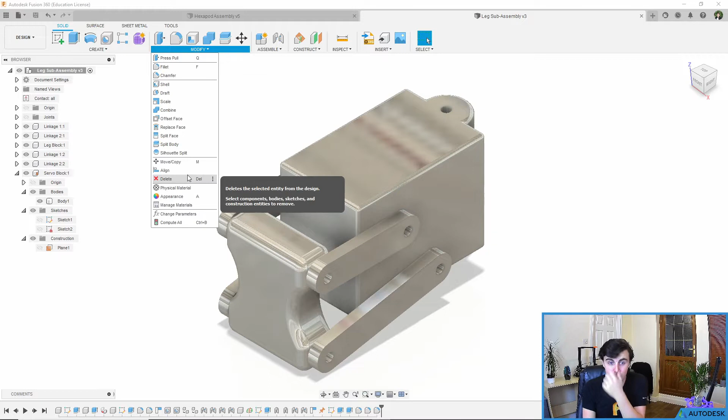The first thing we're going to do is modify our materials. If you remember, we changed everything else in our main assembly to ABS, so we're going to do the same here. I'm going to change our physical material, choose ABS, and drag it onto all of our parts. You can also drag it onto parts in your browser if that's easier. If you can't find them, they're hidden in places, so just be aware you can do it either way.

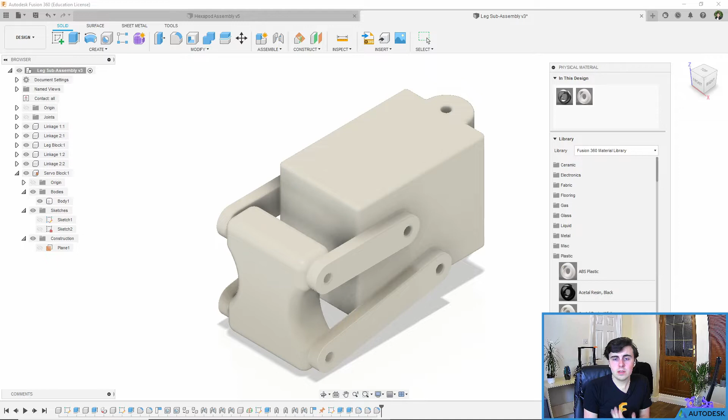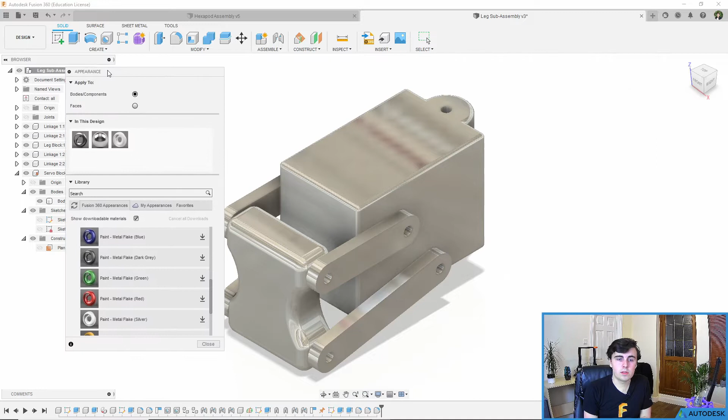Now that it's all ABS, the other thing I want to do is I don't want these to be white, it's just a bit dull. So I'm going to go in and modify my appearances. You can modify your appearance separately to your physical material, and in the case of ABS, you get it in lots of different colors. We're going to go in and choose appearance - you can also press A on your keyboard, that will bring up this appearance menu, which has lots of different options, as you can see.

Normally you start with this long list of 360 appearances. You can also favorite them, but we're going to apply a paint. You can apply lots of different paints - there's the glossy paint, which is the classic. You can drag these on and just test them to see what they look like.

In my case, I quite like these metal flake paints that Fusion has, but you might notice that they're greyed out - I can't drag them, there's a little arrow. This is because these are on the cloud and need to be downloaded to your Fusion. So automatically Fusion doesn't download these all - you'll see this little download button on the right hand side. I quite like this red one, so I'm going to go in and edit it and download the red.

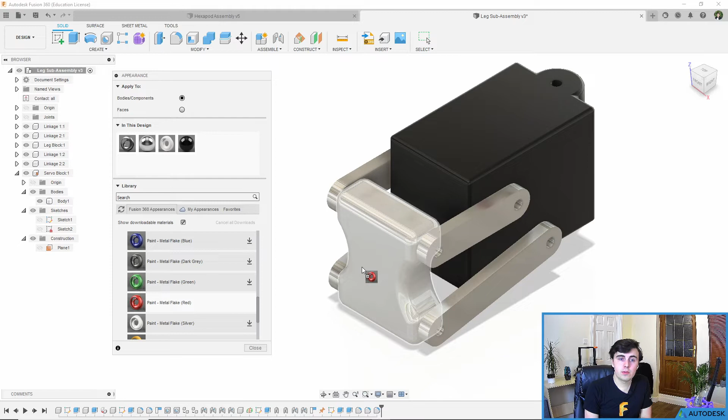You'll see it whirs for a minute and then it becomes white again. I can now use this and drag it onto my part, and it now has this really nice metal flake. I'm going to do the same with the block, I think - make that a nice metal flake black.

And let me make these - let's see, I'm going to use the normal white for these. But yeah, we can always go in and change these a bit later. For you, choose whatever you think looks good - there are loads of really cool options here, from metals and liquids and all sorts. Whilst this is going to be plastic if we made it, in this case you can do whatever you want, make it look cool. So go ahead and have a go at using the different appearances.

You'll notice they all come up here at the top. The other feature I want you to be aware of is this apply to option at the very top. What this changes is you can apply to a single body, for example the entire of our leg block, and instead apply something to a single face. So I could apply a metal of aluminium, for example, to just this front face, and the rest would stay the same. I don't want that, I like my red, so I'm going to undo. But you can apply to just faces if you want to, something to be aware of.

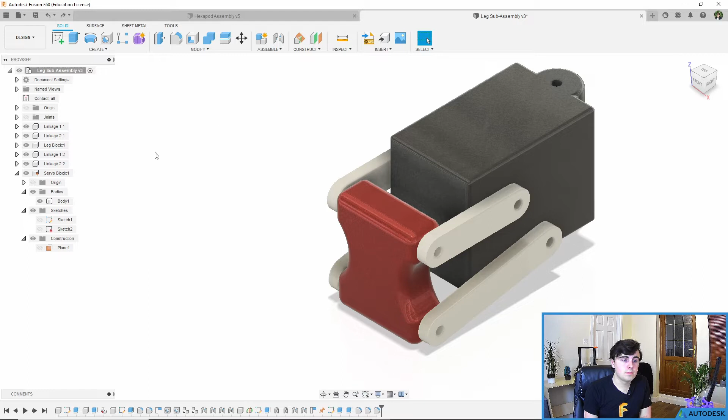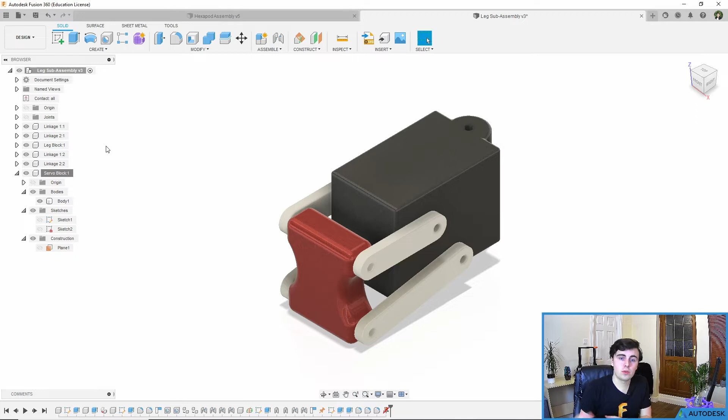The next thing I'm going to do is, now that I know my joints work, I'm actually going to unground our servo block. The reason for this is because I know that in our main assembly it will be fixed, so there's no point in having it grounded here because it could cause problems later down the line. By ungrounding it now, you can make sure that it's all free to move when we import it into our next assembly.

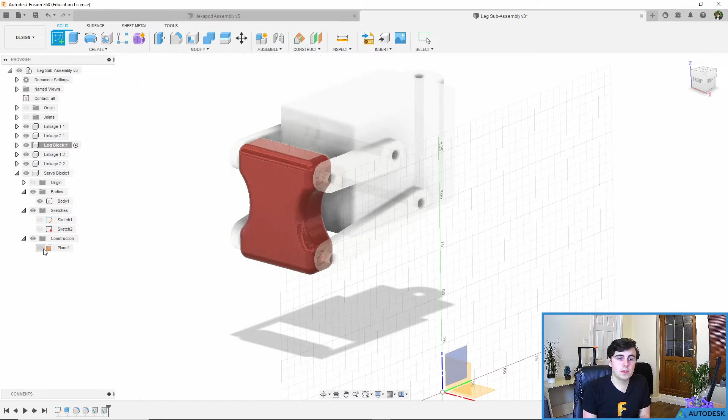The next thing we're going to do is add a little foot onto the end of our part here. So we're going to activate the leg block, so I'm working on that, and I'm going to create a sketch using the same mid-plane that I used before. You can find this within the servo block, because that's where we created it. It's under construction - I actually need to reveal it or unhide it. From here I can select it in the browser or on the main page, and you can see we're now creating a sketch on there.

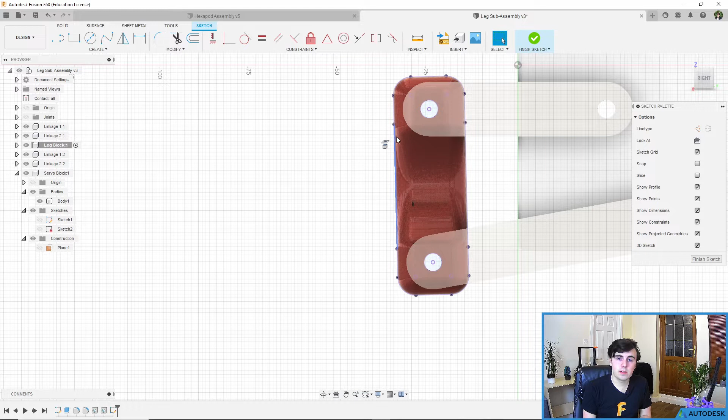I'm going to look at it from the side, and I'm going to use a line - just going to create some cool shapes. Be aware that we want it to lock onto this front surface, so if you press P, you can project as we've done before. I'm going to project this entire body, click OK, and you have this project line on the side there. So you can use the line, and I'm just going to lock it on and make a shape that you're happy with.

I think that looks pretty cool. Again, do whatever shape you like, but we need to make some feet - make sure it's nice and far below the bottom of your leg block. It's now shaded in, so it's an enclosed area because of that line down the middle. So finish the sketch, we can select that,

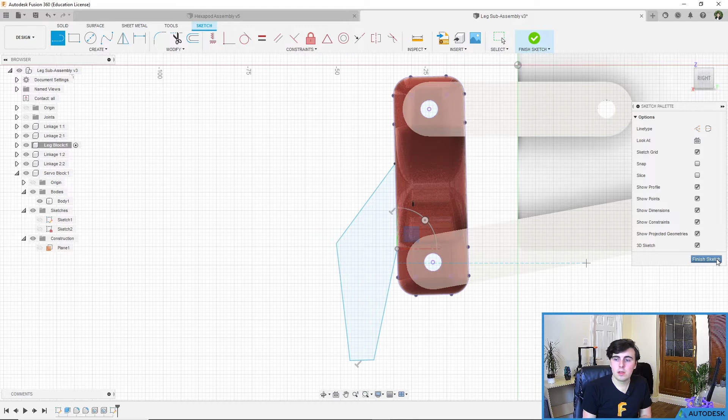extrude, and again we're going to use the symmetric option, make sure that it's symmetric. And you'll notice that it's the same color because it's joining. As I said before, we're now using join because we're activated on the same body, it's recognized that it's touching, and we want it to be one part. So it's automatically joining, which is useful.

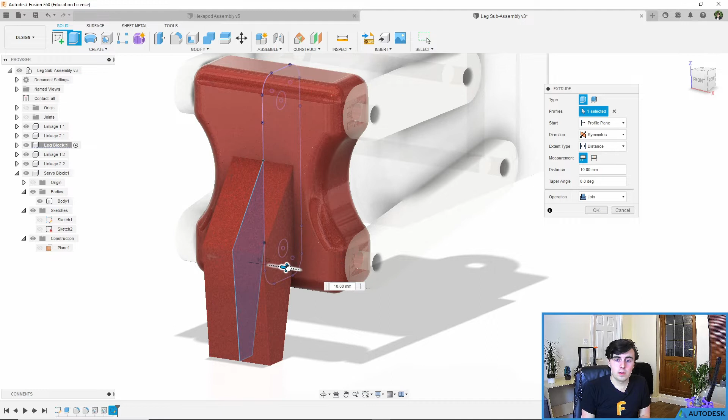I'm going to make this a little bit far - I'm going to make this 7.5 millimeters across. Click OK, and you'll see this is all still one body because we joined it.

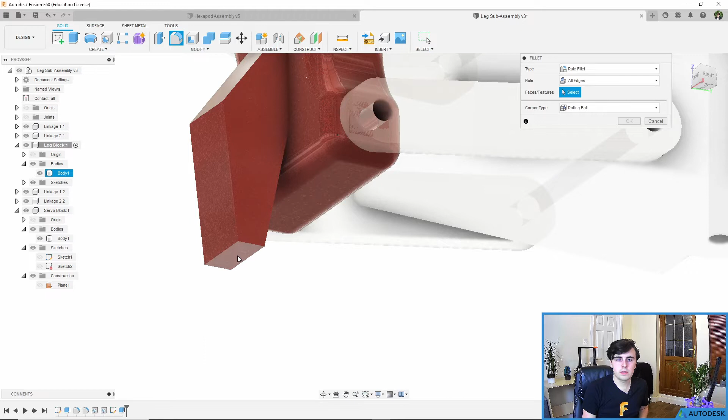I'm going to add some fillets to these just because we want a nice rounded edge on the bottom. So I'm going to go Fillet, select fillet, and just select that bottom edge. We can just play around with that until you're happy with it. There's a nice curved edge down there on the bottom.

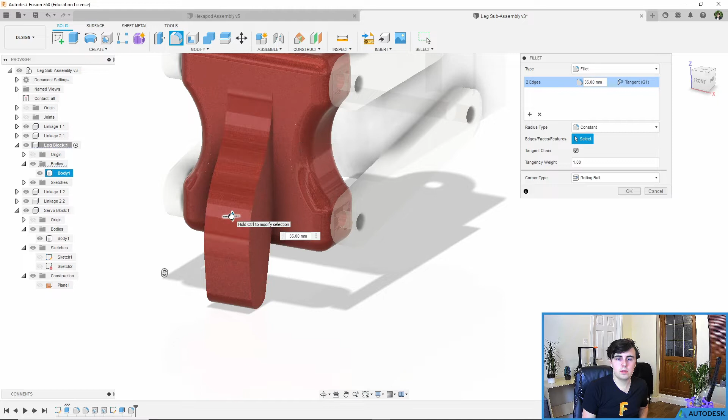I'm also going to add some fillets, just some normal fillets to these edges, just to give it a cool shape. But again, choose whatever fillet size you want, add the fillets that you want. I would recommend adding maybe one in down here at the bottom.

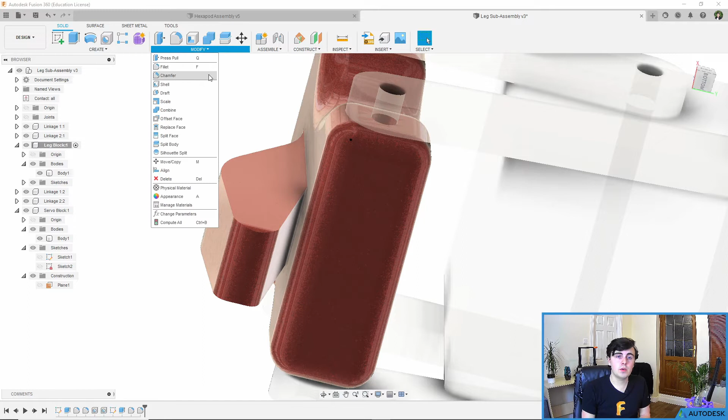But actually, instead of a fillet, what I'm going to do is add a chamfer. Now, a chamfer is slightly different to a fillet in that it's not curved, it's just flat. You can find this within Modify, Chamfer. I'm going to select that bottom edge and just drag it down.

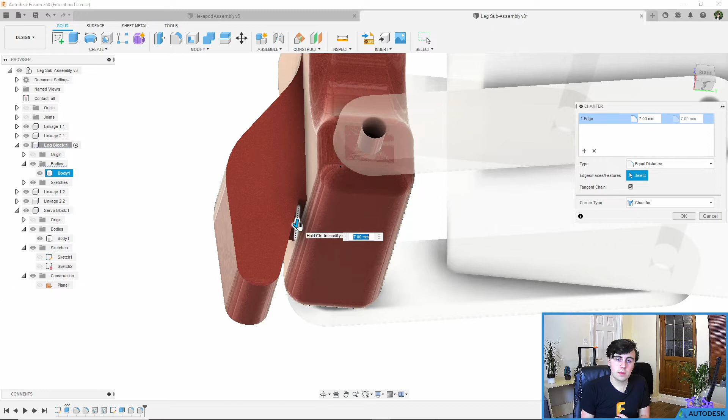Now you see if I come too far, as I said before, Fusion throws up that error we were talking about, because it can't do a chamfer between something that's not there. I'm just going to drag it back until it's happy. And you can see if I go any further than that, we're going past our fillet, so that's why it would be unhappy. I'm just going to add that in to add a little bit more structural integrity.

And even from here I could go in and add a fillet to that inside there. It's really up to you how you want to do it, just come up with a shape that you're happy with.

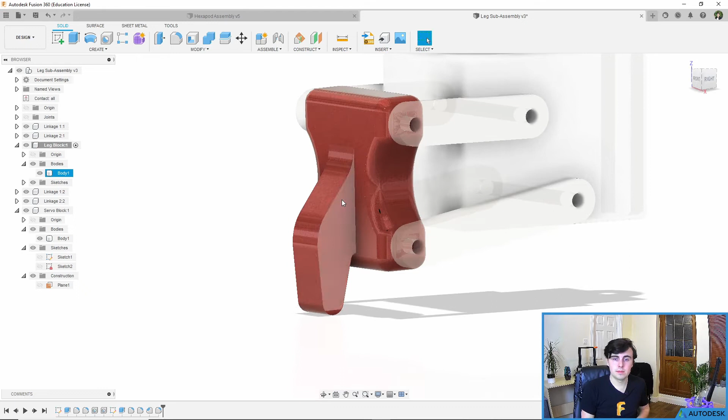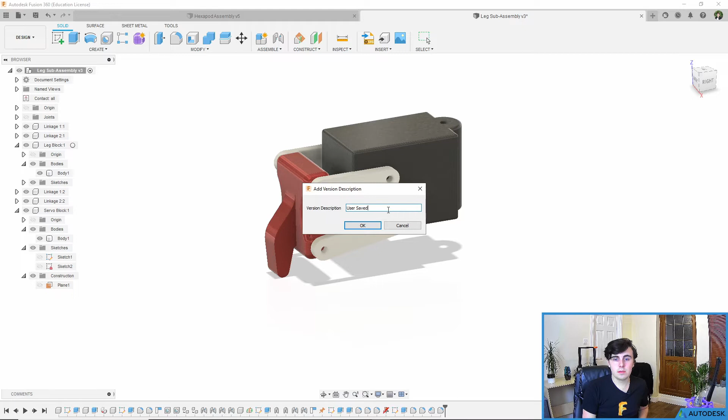Once we've done this, we're going to take our entire parts and put them into our main assembly. First of all, we need to activate the entire part so we can see everything. I'm just going to do a double check - I think everything is looking quite good. We're going to save it, and I'm just going to say 'feet added'. By saving it, we're making sure it's always up to date, so that when we bring it into our next file, this is the most up-to-date version.

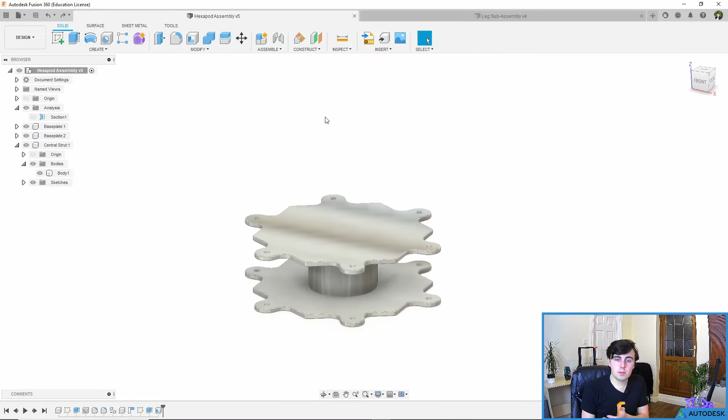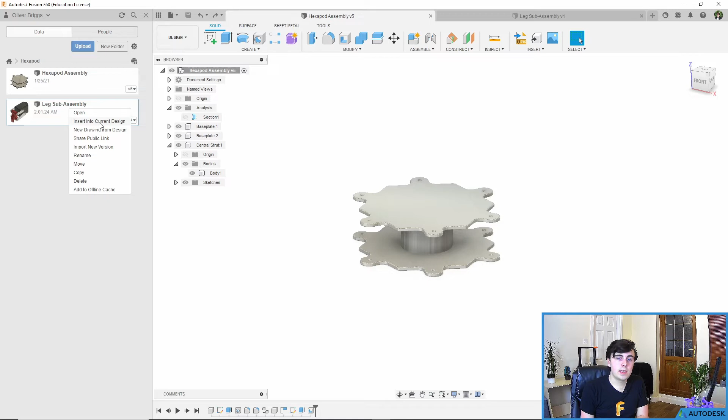What we're going to do is go into our hexapod assembly file, which is our main assembly file, and open our data panel. If you're not already, open up the hexapod project, and you'll see your two files are already there. We can see all the versions, and what we want to do is bring this into our design. We can right click and say insert into current design. Fusion will then bring it in and you'll see it appear as a new component.

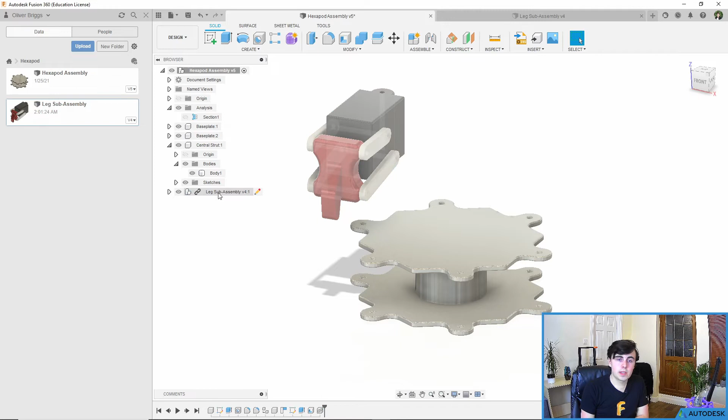We're going to add joints to this, so we don't need to move it right now. Click OK and you'll see that part is inserted. Now you'll notice that to the left of our part is a little link - this means that our part is directly linked to the subassembly that we created here.

Therefore, if we change something - for example, if I change the color, I've already got it open - I could modify appearance, and I could say that actually I would like these legs to be a dark grey.

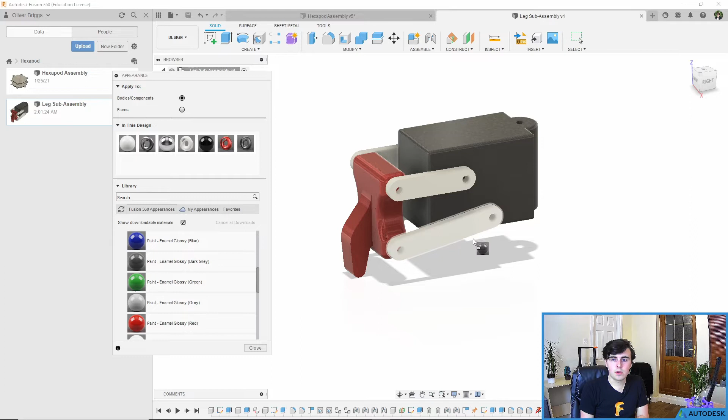I could modify that, close, and then when I save, you'll see it updates here. If we go back into our hexapod assembly, a little warning will come up saying one component is out of date. You've got one here, one here, one here - can't miss it. All you have to do to update your file is click on that, and Fusion will automatically update it, and you'll see that the color has now changed.

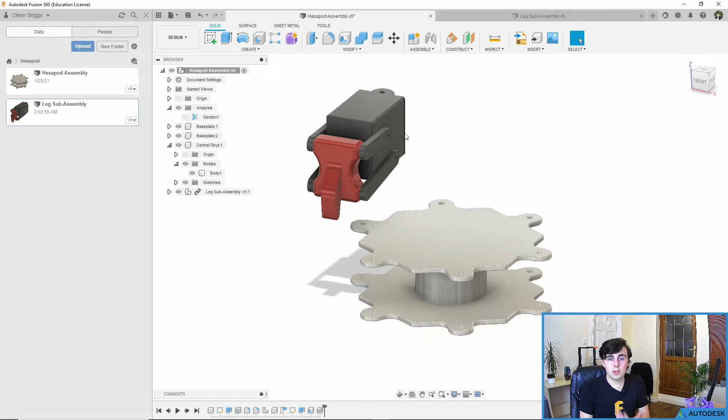This is the direct link between your two files, and it allows you to go in and edit parts as you want to. You will notice, however, that you can't just go in and edit a part here. If I went into Modify and Appearance on this file, I can't just drag something in and it won't work. I can bring it in and drag it on, but you'll see that nothing is changing. The reason for this is that it's linked directly to the previous part, which means we can't just change it here.

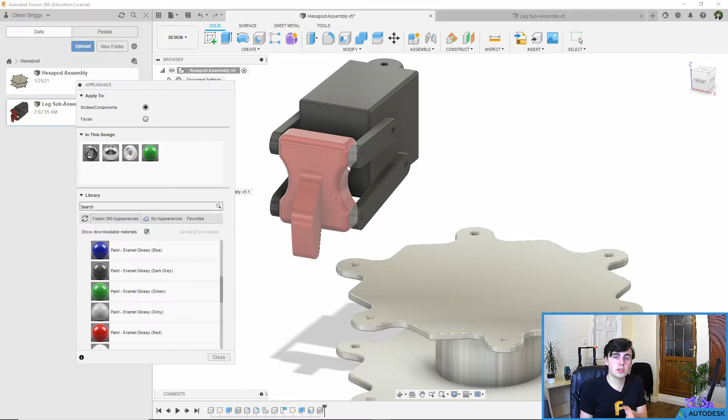Something I want to make you aware of is a way you can do this from within your part, because it can become a pain having to reopen all your parts, go in and change them, save them, and update. I'm going to close that now completely because I don't need to use that anymore.

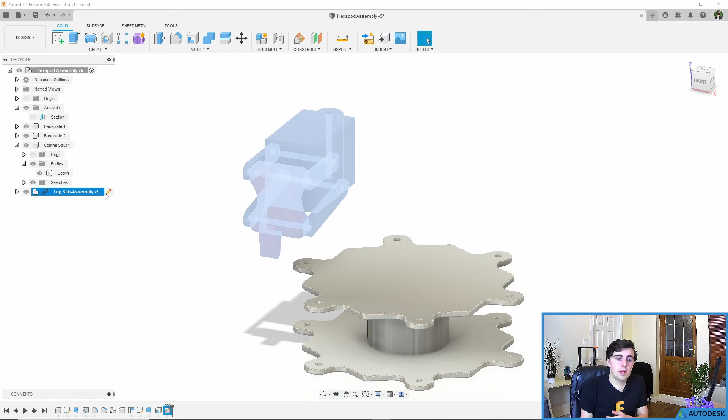What we can do is go into our leg subassembly, and instead of activating it, you'll see there's an edit in place option - a little pen. What this does is it allows you to edit that specific component within the current one we have in our assembly. You'll see the blue box appears around your part, showing that your leg subassembly is the one being edited. From here, we can go in and make changes as we want to.

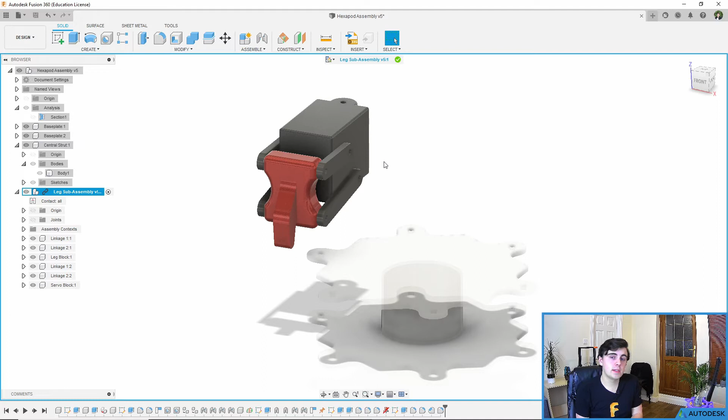You can extrude, you can modify, you can do anything that you want to, and this will allow you to completely edit your part from within the assembly that it's in. Once you're done, you click on the little tick to finish edit in place, and you'll go back to the main assembly. That is how you edit a linked part within an assembly - a really, really useful tool. Just wanted to make sure you were aware of it and how you can do it.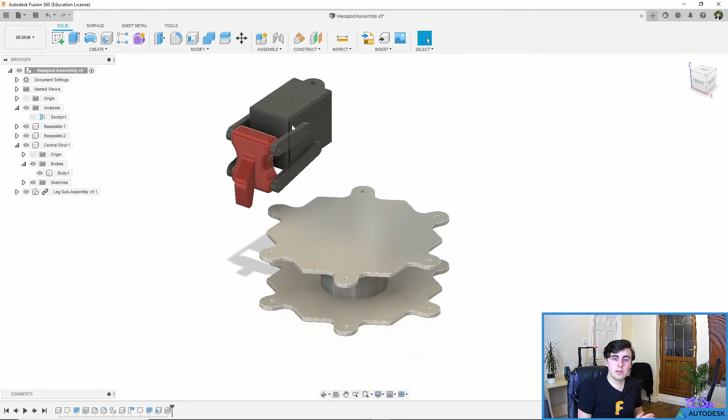What we need to do is add our joints in to make sure that all our parts are connected. First of all, you might notice none of these are connected - we can drag and drop them, but we don't want to do that, so we need to add in some joints. We've done this already, so add in joint - this can be an as-built joint because it's already in the right place. We want these to be fixed, rigid, so I've selected rigid, and these two have an as-built joint. We can create another one for the bottom two, and now everything is jointed together.

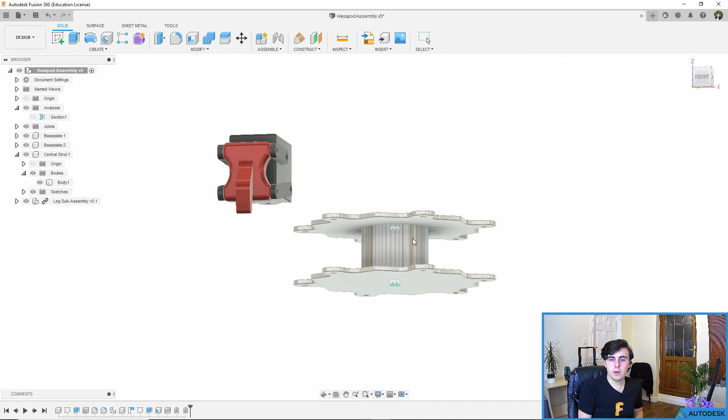We're going to go in and ground this bottom part, the bottom base plate, just so that it's not moving anywhere, and you'll see that nothing will move.

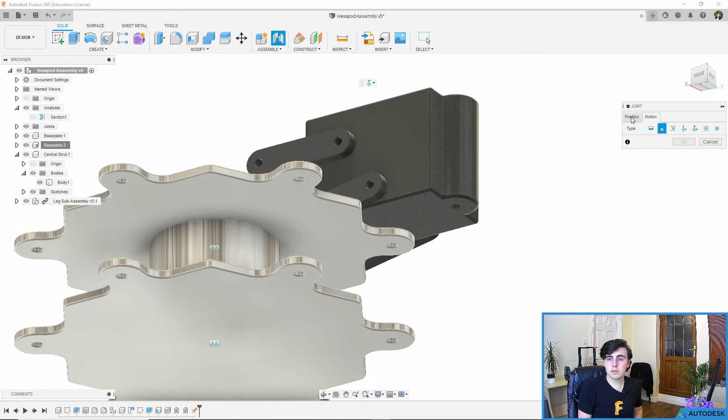From here we can add in joints for our next part. I'm going to add in a joint on the bottom faces, add a joint, and we're going to make it a revolute joint. Select that bottom circle, and select the bottom circle here, and you'll see that it can revolve around. Once it stops animating, you can see that you can actually rotate it, and this will define your component's standard place that it's set.

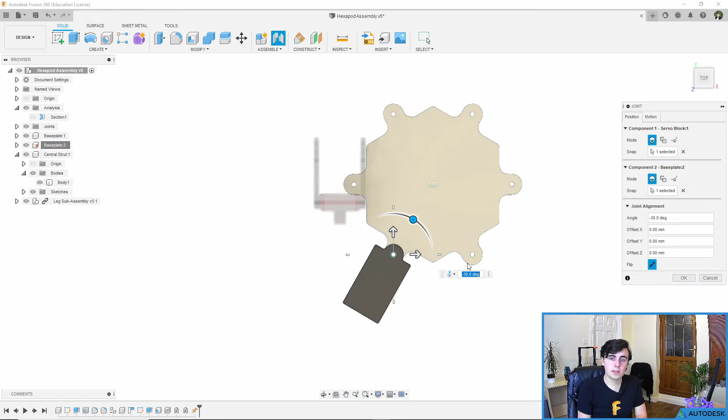So we're just going to rotate this around until it's looking roughly straight on with our part - negative 30 degrees in this case. Click OK, and you can see that revolute joint has been applied, and we can move our leg around. We're going to undo that just so it stays flat.

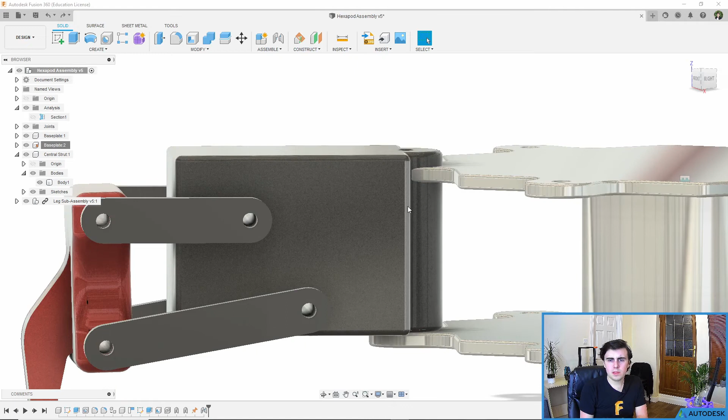Now you'll notice we must have made a mistake here, because this gap, if we inspect it, is 50 millimeters, and yet our part is jutting out, which means it must be too big. If I inspect this, yes, it looks like it's 60 millimeters. We've clearly made a mistake there, so what we're going to do is go back and edit that.

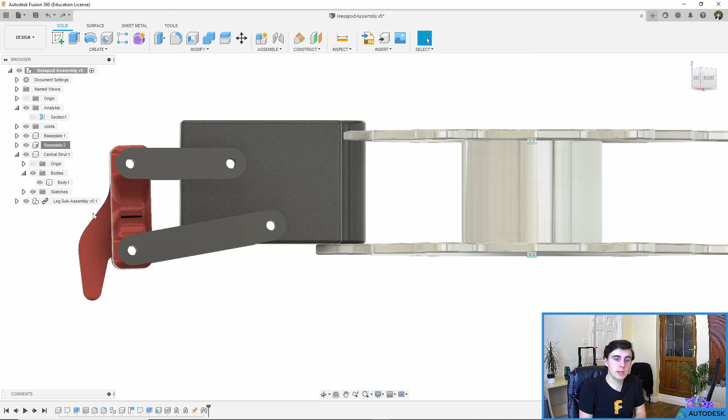As I just said, we can use edit in place - the little pen. Now that we're in our component, we can go in and edit it. It's our servo block that's incorrect, so we're going to go in and activate our servo block. Now the issue is actually with our sketching here - I think we added a 60mm height for our sketch rather than 50.

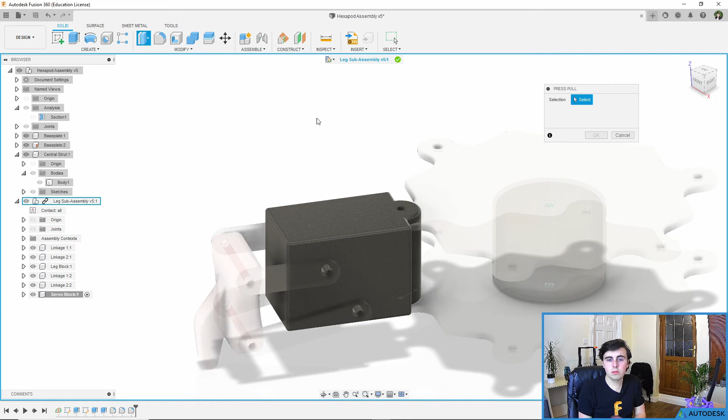But instead of changing that, I'm actually going to show you the modify tool called press pull. What this allows you to do is use the press pull feature up in modify, so Q, and you can select this top surface, and it will modify that surface by moving it. What it'll do is take the fillets and all the adjustments and modify those as well. So we want this to be 10 millimeters less.

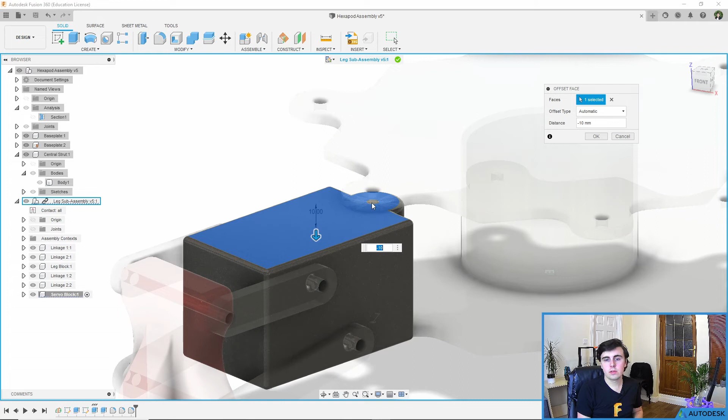We can say negative 10. You can see that it now fits within our part perfectly, but all of our fillets and all of our changes, including our hole and everything, have been moved as well. So it's a really useful tool in that case. Click OK.

End edit in place, and you can see that our part now fits perfectly in between the two parts. Looking good.

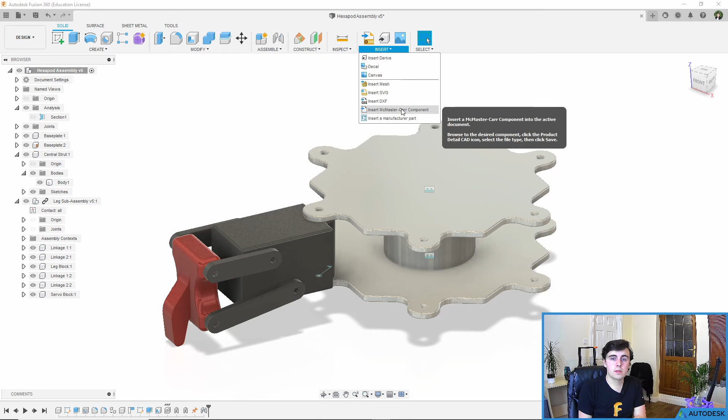Finally, I want to show you a way that you can add in fixings. There are lots of ways to increase how realistic your part is, and one of them is by inserting bolts and nuts. Rather than modeling them every time, which would be really annoying, you can instead insert a McMaster-Carr part or component. This brings up a menu with a whole catalogue of different parts you can insert.

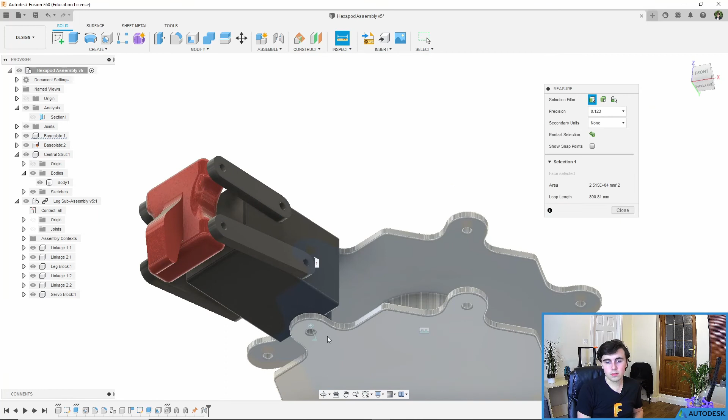Before we do this, I'm going to inspect the dimensions for this hole, measuring from the top surface down to the bottom surface. It's a 60mm gap, and we want a little bit more than that for the bolt and nut to be able to go on. I'd say we want maybe a 65 or 70mm bolt.

So we go Insert, McMaster-Carr, and from here we can select Screws and Bolts. We can choose the type of bolt we'd like - let's go with a rounded head screw. There are lots of different ways to filter on the left. I'm in the UK, so I use the metric system, and I want a 5mm hole, which is M5. I'm going to choose a hex drive head.

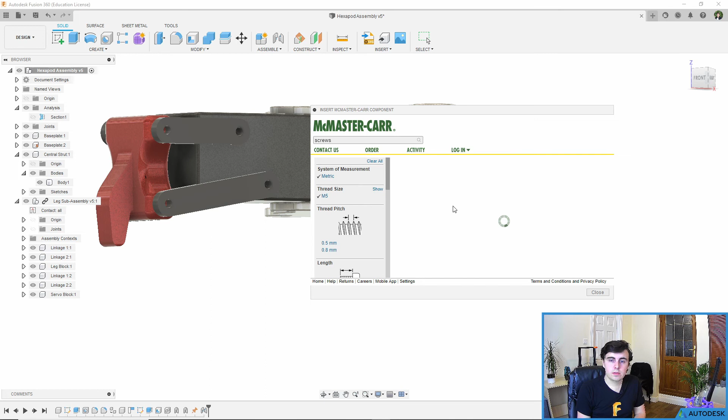We can go through and look at all the different options with the screw threads and pitches. In this case it doesn't matter too much, but the length is one of the important parts - it's the left-hand part here, and we wanted our part to be 65 or 70mm, so I'm going to select the 65.

From here, you can click on Product Detail, which takes you to the product detail of that part. If you scroll down all the way here, you can choose the type of file you want to import. Normally for Fusion we use a 3D step file, but a lot of these will work. Click Download.

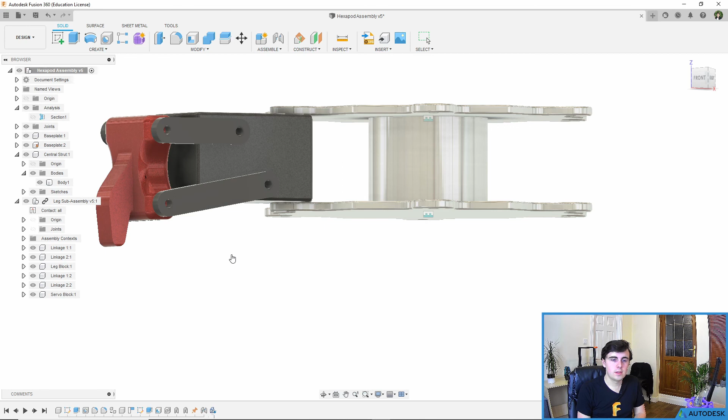That part will be inserted into your main assembly once Fusion works. There we go - you can see our part's been inserted, and you can move it around.

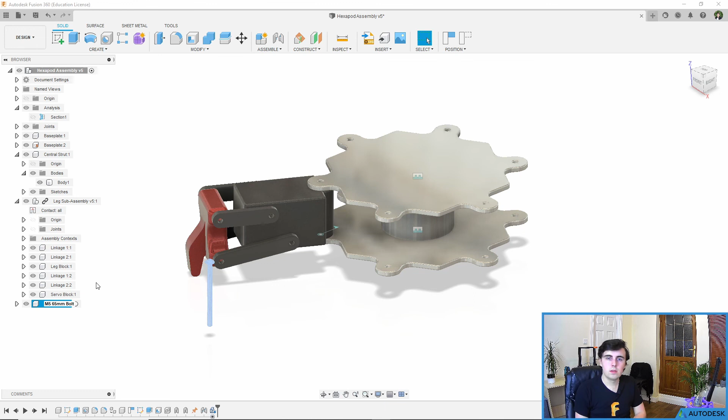Now I typically like to go in and rename these because they come up with a weird number, and it's very difficult to distinguish them if you have lots of fixings in the part. So I'm going to call this an M5 65mm bolt. It doesn't have to be specific, just something that you know what it's going to be.

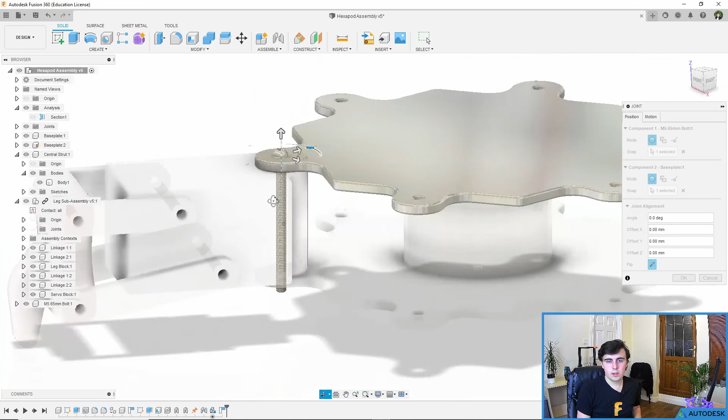From here we can apply a joint, capture position, and apply a joint between this bottom surface - again I can press Control to select that center part - and put it on the top surface here. Technically it's a revolute joint because the bolt can rotate, and you can see now that our bolt goes through our part. We have a bit of thread at the bottom to be able to add a nut.

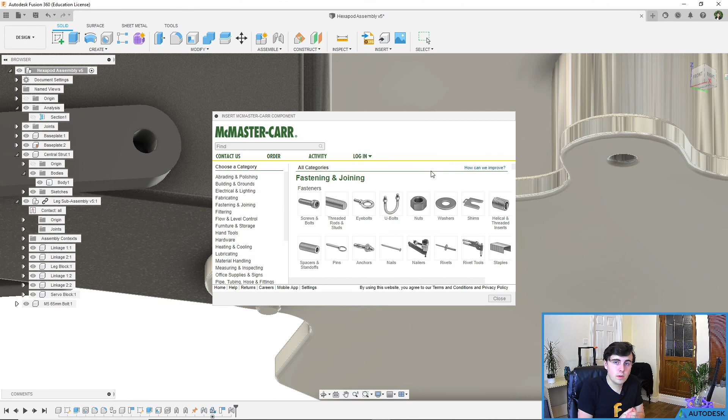You could go in, insert McMaster-Carr, nuts, and go through - I'm not going to go through all these now, that's something you can do in your own time if you feel you want to. But you can add nuts, washers, and almost any part from McMaster-Carr. It's a very, very useful tool to know about.

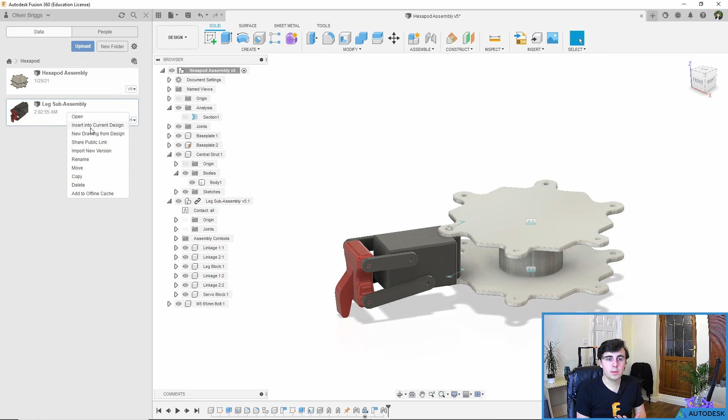If you'd like, go through and add all the fixings that you want. But the next part is to add all of our legs as well. Again I'm not going to do it, but you insert another part and repeat the process until you have all 6 of your legs fixed in. I'm going to end the video here, but I'd like you to go away and add all of those parts, and if you'd like, add all the bolts and nuts, etc. Then we have our completed part.